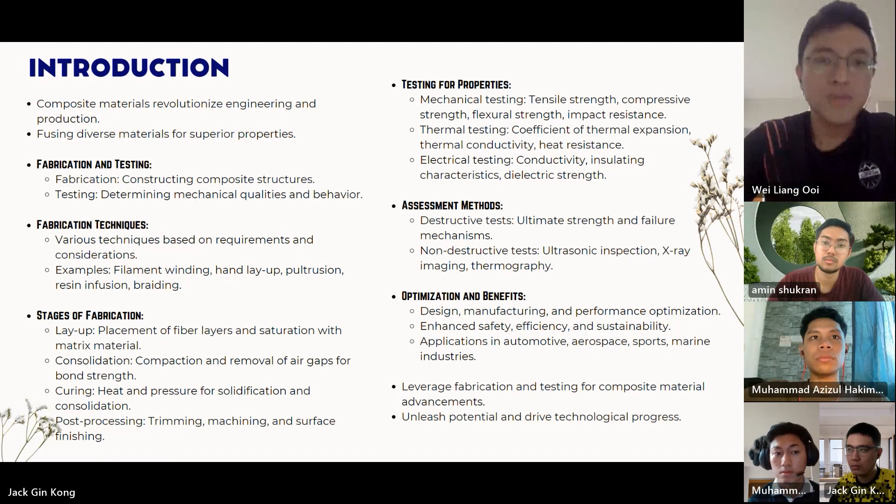For the problem statement: fabricating glass fiber and cotton reinforced composites presents challenges in achieving uniform fiber distribution and alignment within the matrix. Homogeneous mixing, fiber content consideration, and proper curing methods are critical factors. Understanding the fabrication process helps optimize fiber distribution and alignment, enhancing composite performance.

Comparative analysis of mechanical properties like tensile strength, modulus of elasticity, and elongation at break is crucial. This analysis evaluates performance and applicability, aiding material selection for specific applications. Comparative studies highlight the unique characteristics and advantages of glass fiber and cotton reinforced composites.

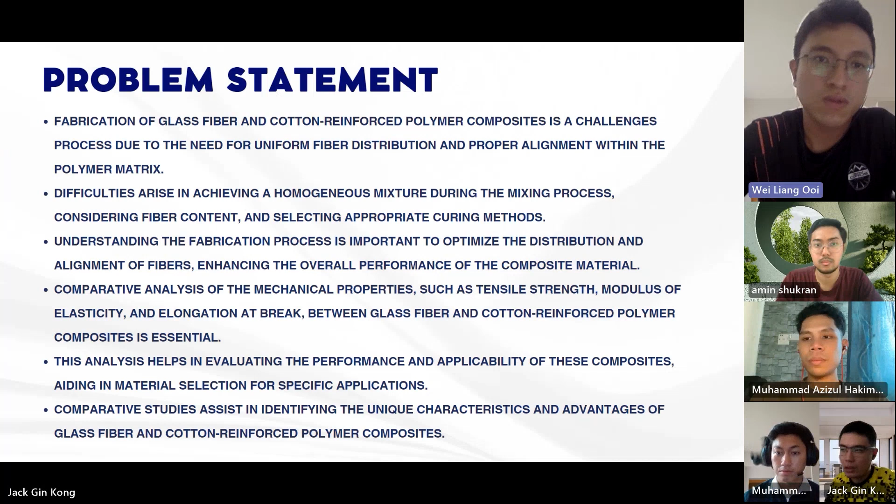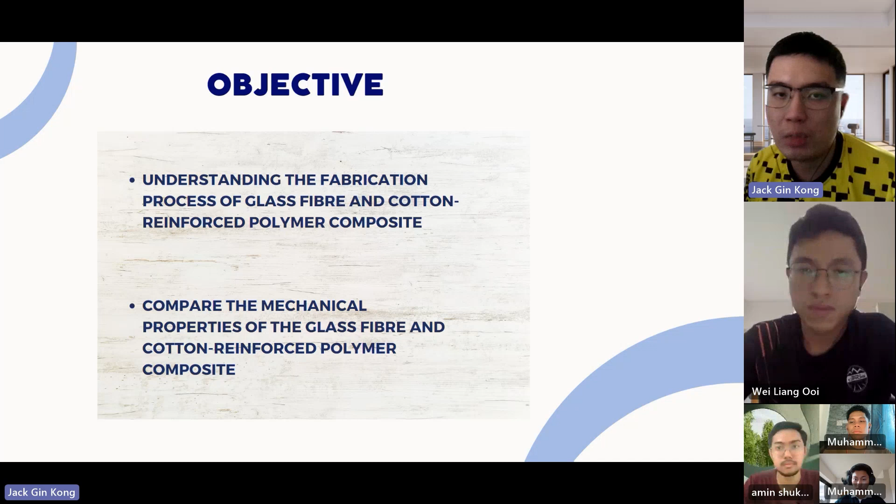For the project objective: understanding the fabrication process of glass fiber and cotton reinforced polymer composite, and comparing the mechanical properties of the glass fiber and cotton reinforced polymer composite.

For the literature review, we have some methods to produce composite materials. The first method is the solid state process. In the fabrication of metal matrix composites, the solid state process has been essentially studied. Researchers have explored methods such as hot isostatic pressing, spark plasma sintering, and powder metallurgy.

Powder metallurgy offers cost effectiveness and the ability to fabricate complex geometries, and spark plasma sintering enables the production of high-density composites with limited grain growth. Hot isostatic pressing, on the other hand, efficiently eliminates defects and enhances mechanical properties. These methods are evaluated by testing techniques such as tensile testing and sintering process analysis.

The second method is the stir casting process. One of the popular techniques for producing metal matrix composites is stir casting. It involves mechanically stirring reinforcement particles into a molten matrix. However, achieving proper particle wetting and uniform dispersion can be challenging. Researchers have used molding or casting to shape the matrix, and the resulting composite has been evaluated using various methods.

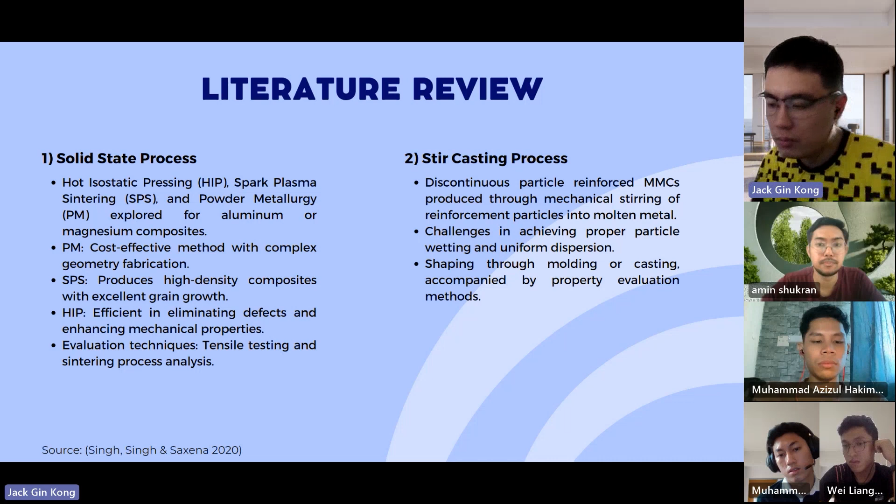The third method is the spray up method. This is a fabrication technique where a hand-operated spray gun is used to apply high pressure matrix and chopped fiber reinforcement, typically roving glass. The matrix and reinforcement can be sprayed separately and cured at either standard or elevated temperature. Although the resulting products are voluminous and resin-rich, the process generally results in relatively poor mechanical properties.

The fourth method is squeeze casting. This technique combines forging and casting processes in the fabrication of metal matrix composites. It involves solidification of molten metal under pressure with dispersed reinforcements. The process includes preheating the metal, pouring the molten metal, applying pressure, and removing the composite material. Researchers have identified important process parameters that affect the quality of squeeze cast composites, although standardized control rules for these parameters are still lacking.

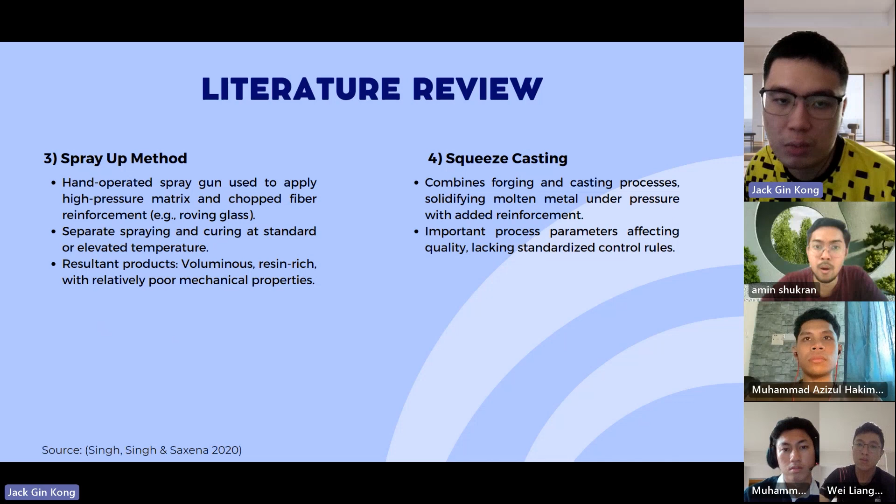The last method is ultrasonic assisted casting. This technique employs high-frequency mechanical vibration to induce cavitation in the liquid. This cavitation process results in the growth and explosion of microbubbles, facilitating uniform dispersion and disintegration of particle agglomerations. In nanocomposite variations, ultrasonic assisted casting has proven particularly effective in addressing agglomeration formation. The explosive collapse of bubbles during the cavitation cycle generates high temperature, pressure, and rapid heating or cooling rates, which assist in this disintegration process.

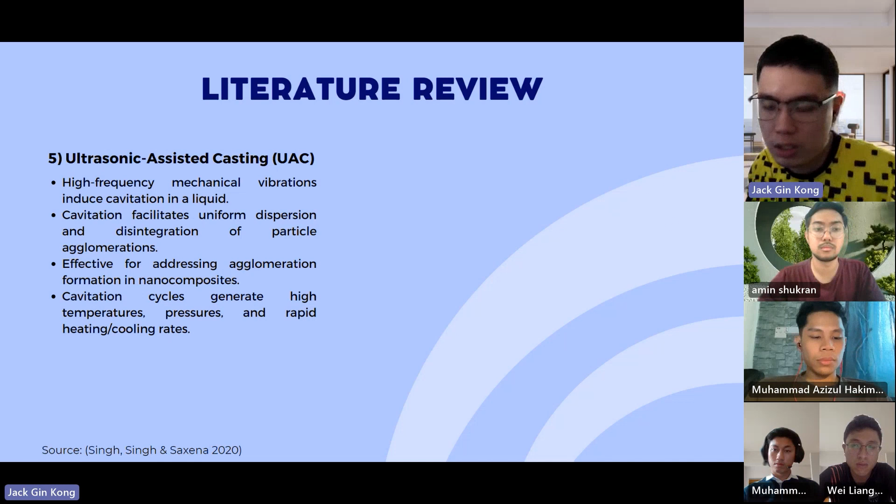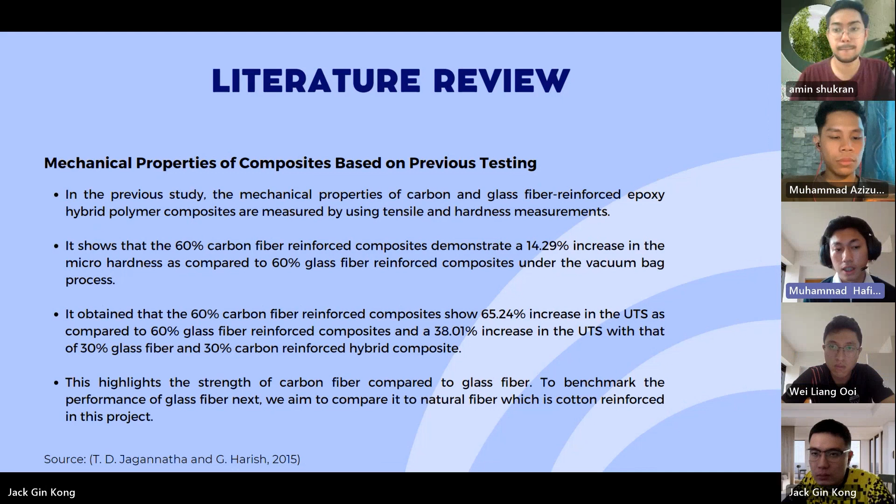Next, the literature review for the mechanical properties of composites based on previous testing. In a previous study, the mechanical properties of carbon and glass fiber reinforced epoxy hybrid polymer composites were measured using tensile and hardness measurements. It shows that 60% carbon fiber composite demonstrates a 14.29% increase in micro hardness compared to 60% glass fiber reinforced composite under the vacuum bag process.

It was found that the 60% carbon fiber reinforced composite shows a 65.24% increase in UTS compared to 60% glass fiber reinforced composite, and a 38.01% increase in UTS compared to a 30% glass fiber and 30% carbon fiber reinforced hybrid composite. This highlights the strength of carbon fiber compared to glass fiber.

To benchmark the performance of glass fiber, we aim to compare it to a natural fiber, which is cotton, reinforced in this project. Next.

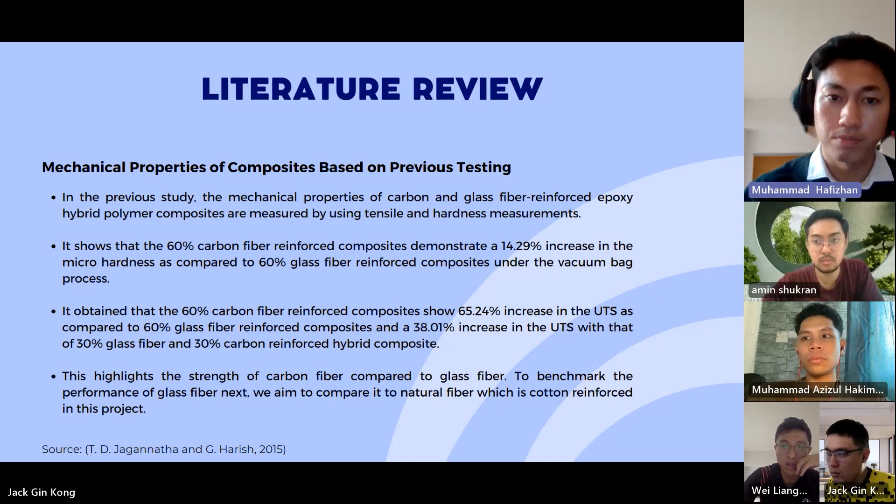For the methodology used in this project, we use the hand layup technique as a versatile approach for composite fabrication. This is because its simplicity makes customization easier for pouring the resin mixture; it offers precision control, is ideal for small scale production, provides experimental flexibility, and lastly, unveils composite performance. Next.

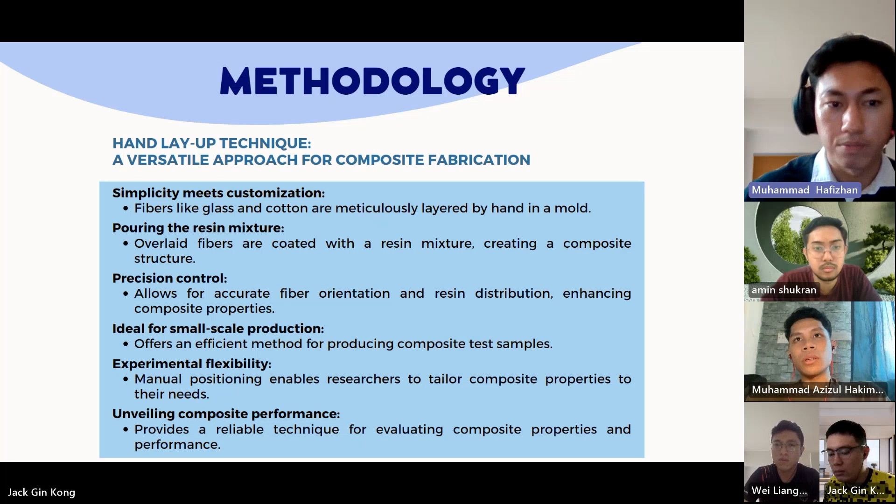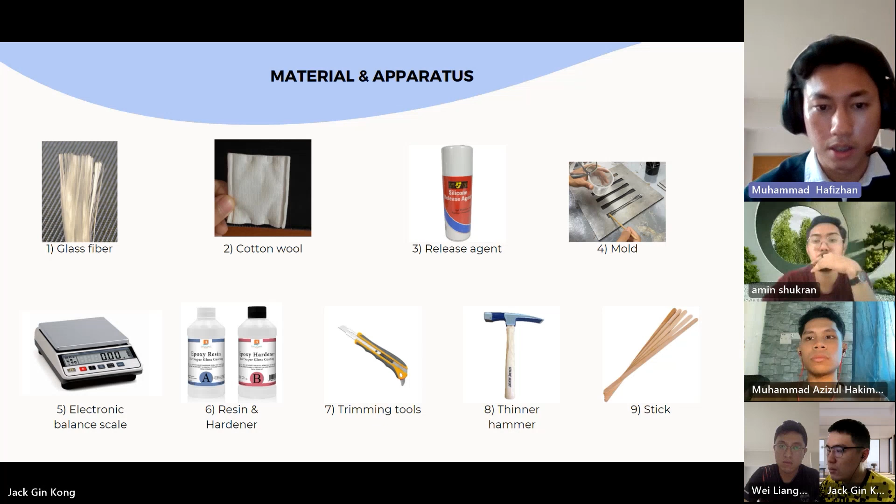So these are the 9 materials and apparatus that we use in this project. The first one is glass fiber as the fiber, and cotton wool as the natural fiber, the release agent, mold, balance scale, resin and hardener, trimming tools, hammer, and lastly we use the stick.

Next, for the procedure: first, ensure that the workspace is clean and well ventilated. Wear appropriate attire according to the lab rules, including wearing shoes and a proper shirt.

Second, differentiate between the fiber reinforced composite and natural composites. Cut glass fiber into long pieces for the fiber reinforced composite, and chop cotton wool into short pieces for the natural composite.

Third, using an electronic balance scale, measure 20 grams of resin and 10 grams of hardener according to the required ratio for the specific resin used.

Number 4, in the mixing container, combine the measured amount of resin and hardener using a stirring stick or any paddle to mix them together. Scrape the sides and bottom of the container to incorporate all the components, and this mixture will serve as the matrix for the test sample.

Step 5, apply a release agent to the mold to prevent the composite from sticking. Place the cut glass fiber and cotton wool into the mold.

Number 6, pour the previously prepared resin-hardener mixture into the mold, ensuring even distribution over the glass fiber and cotton wool. Stir the mixture gently to ensure the fibers are well coated and any excess air is released.

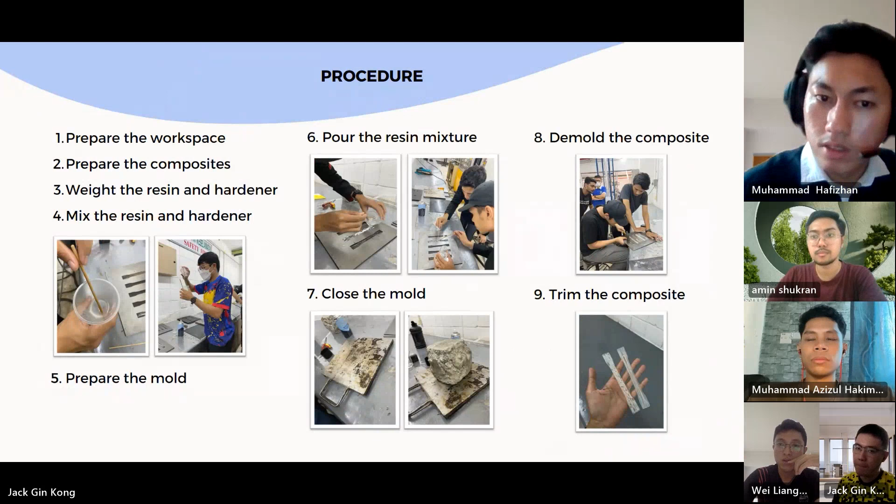Okay, so the testing part was not conducted in the lab. Therefore, past research will be used to discuss the possible outcomes for tensile testing for both glass fiber and cotton fiber reinforced epoxy.

The first study will focus on tensile strength for glass and cotton fiber. The composites were prepared using a hand lay-up process. Next, the test was carried out using a universal testing machine where composite specimens were placed in the grips, where the fibers were pulled at a speed of 5 mm per minute until failure occurred.

The results of the tensile test were then obtained and compared. Based on the result, glass fiber composite possesses higher tensile strength at 2,400 megapascals compared to cotton fiber at only 400 megapascals. This result showed the comparison without considering the orientation of fibers.

But corresponding with both reinforcements' mechanical properties like Young's modulus, which indicates that resin with glass fiber reinforcement will resist deformation better than resin with cotton fiber reinforcement, due to the higher Young's modulus.

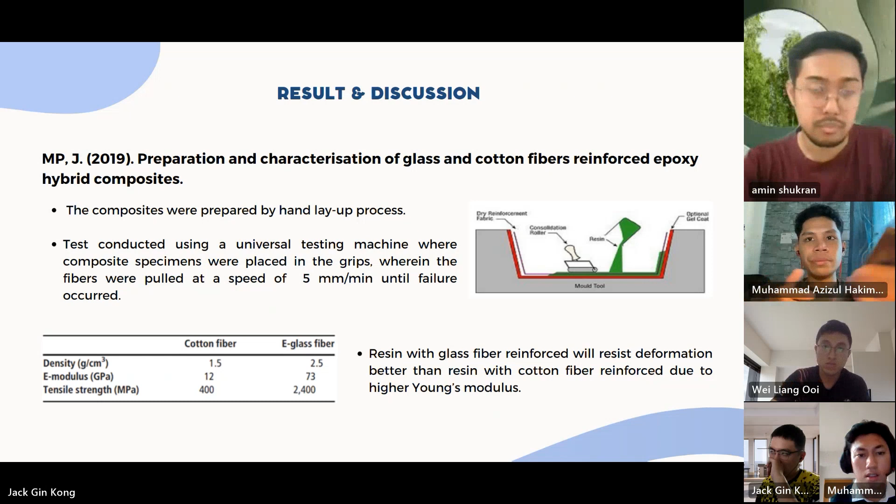Next, another finding worth discussing is the evaluation of compressive strength between recycled cotton fibers (RCF) and glass fibers (GF) reinforced polyester.

It is valid to relate this to the study on tensile strength, since both are normal forces per area, differing only by pulling and pushing forces.

The total samples tested were 7: 3 RCF, 3 glass fiber, and 1 control experiment sample of double layered cardboard. Since glass fibers are more crystalline and more rigid compared to natural origin cellulosic fibers such as cotton,

glass fiber-based composites offer higher stiffness and compressive strength compared to cotton fiber-based composites. However, it is important to note that the glass fiber-based composite samples were developed with a higher fiber volume fraction at 50%, compared to RCF-based composite samples at only 40%.

Thus, the fiber mechanical properties and the fiber volume fraction have significant influence on the overall composite mechanical performance. Then I will pass to my friend Azizul.

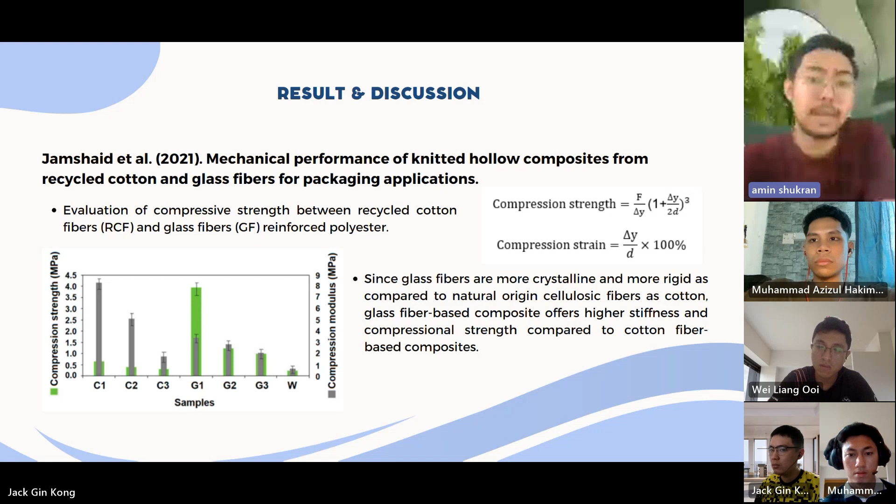So this is the last result, which is tensile, impact, and fiber length properties of injection molded short and long glass fiber reinforced polyamide 6, 6 composites.

Since our specimen fabrication used 2 types of fiber orientations, tensile tests on injection molded short and long glass fiber reinforced polyamide give some insight on the relationship between fiber orientation and tensile strength of fiber reinforced composite.

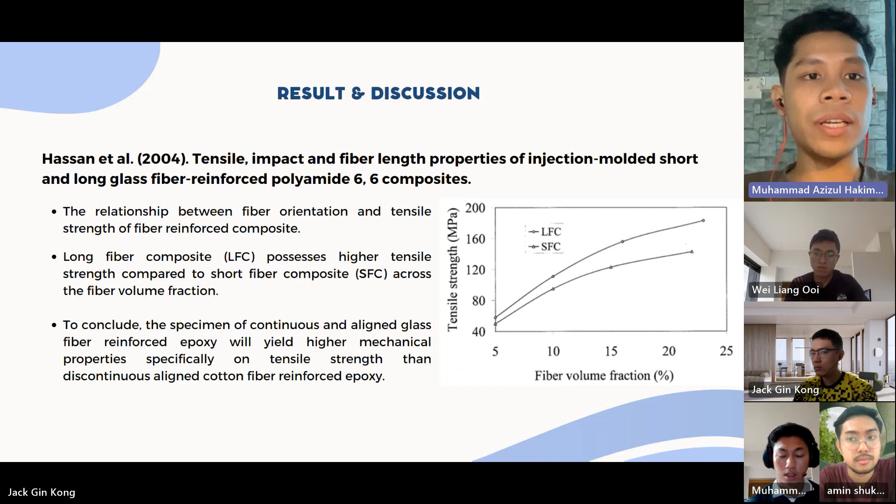Long fiber composite (LFC) possesses higher tensile strength compared to short fiber composite (SFC) across the fiber volume fraction. This is due to the existence of longer fiber restricting matrix movement more than short fiber, even at low volume fraction.

To conclude, the specimen of continuous and aligned glass fiber reinforced epoxy will yield higher mechanical properties, specifically tensile strength, than discontinuous aligned cotton fiber reinforced epoxy.

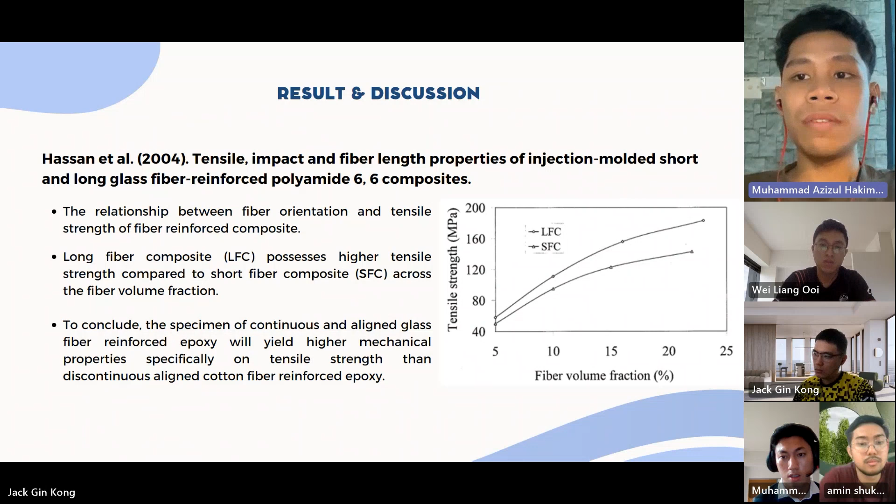Next, I will conclude our project. So the objectives are achieved after a successful fabrication process and comparison study.

In this project, we were exposed to the issues, problems, and challenges before, during, and after the fabrication process of composite materials. These problems emphasize the need to reduce fabrication errors for better performance, such as in our project, where there is a void in our specimen.

We also had the chance to observe and feel the texture of the produced composites through the hand lay-up fabrication process, and we are able to understand the fundamentals of composite materials and identify their mechanical properties. Lastly, a comparison of the performance of glass fiber and cotton reinforced polymer composite is made.